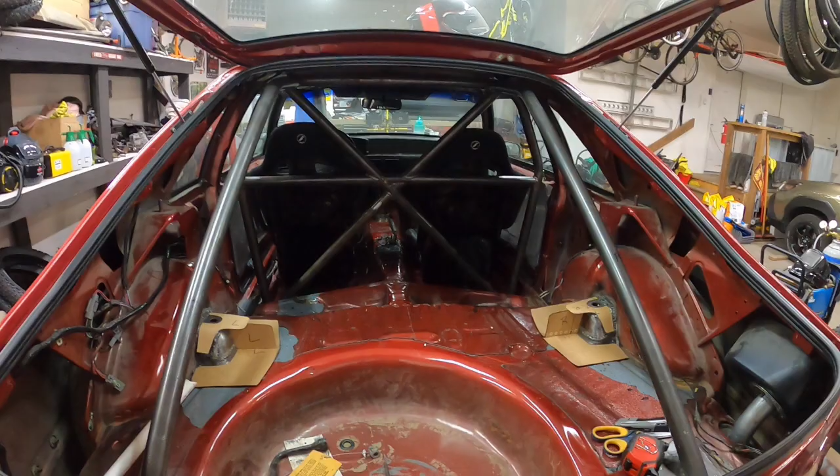Well, it's been a while since I've been out here and fired up the GoPro working on the Foxbody, the Mustang here. And I just thought I'd show you guys where I'm at. So last update I showed, I had the cage all welded in. Well, I still wanted to reinforce these shock towers a little more, just because I'm probably overthinking it, overly paranoid. But I thought it'd be kind of fun to do too, and maybe add some more structure back here to kind of dress it up, I think.

But this is kind of what I'm figuring I'll do is I'll put a plate on the floor. And then the frame rail, can't see spot welds very good here, but the frame rail kind of runs up under the car here. So I thought I'd use this plate, and I think I'm making it a little bit too big. So I'm going to take some time and think about this a little, see if I want to trim it up.

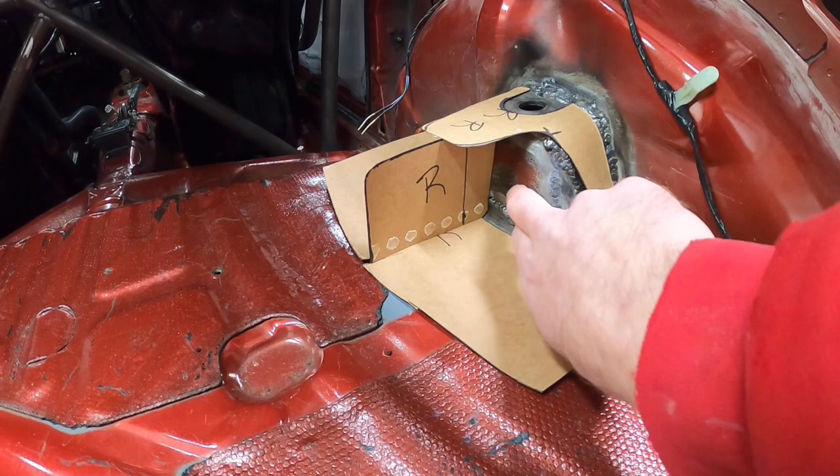But anyways, the frame rail runs under here, and I thought I'd make a plate that goes on top here that kind of ties in to the top side of the frame rails on each side, and then make another piece that kind of goes up and over the top of the shock tower here. And I'm going to leave a little opening here for the little rubber bushing and everything that goes for the top of the shock, the coilover, just so I'm not getting it too thick here. And then use another piece here, an upright, so then it'll tie in to the bottom plate, the top plate, and then weld it into the shock tower there to really reinforce it.

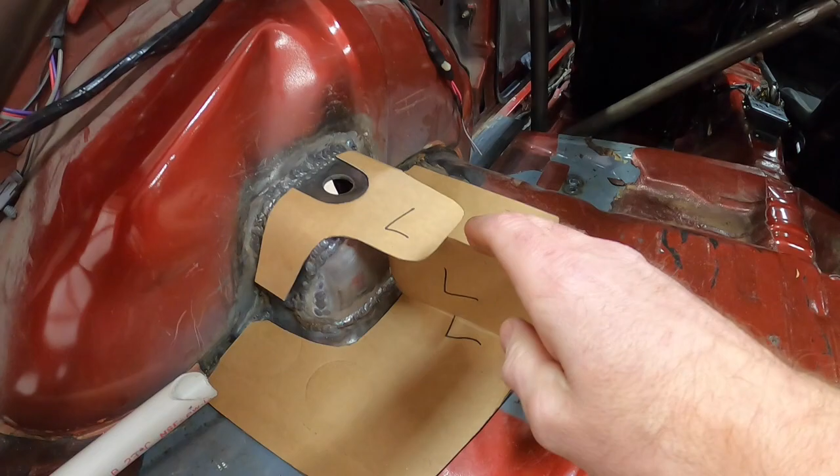Then what I think I'm going to do is run a bar across side to side, and then run another bar and put a tab on the bottom of the cage here, and run it down to the top of this upright bracket on each side. And see here a little bit, this down tube from the roll cage is a little bit more towards the center of the car than what this side is. But I'm thinking I'm going to run a tube pretty much straight down so it's completely vertical from the roll cage down to the top of here.

So I'm actually thinking about trimming up this piece on both sides, trimming this back just a little bit. This side I think I'm going to trim back just a little bit here, and I think I'm going to actually build this so it comes up over the top of here and has a tab on the top to tie into the roll cage.

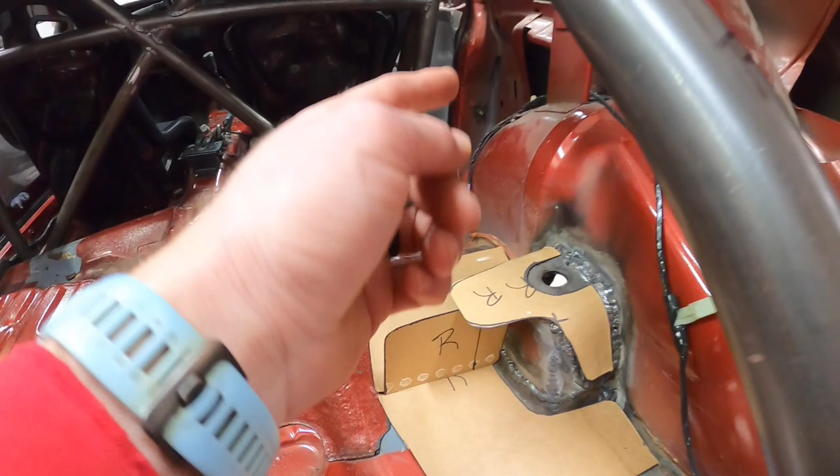And I'm thinking I'm going to do that on each side here, but like I said, this side sticks out a little more, so I might just leave this tab hanging out this much on this side, and again make this piece a little bit taller so it has a tab up on the top, and then put a tab on the bottom of the roll cage there, and then tie that all in. But I'm going to go inside, do some math, and figure out what I really need here, and then I'm going to go from there.

I don't know how you can lay here on this floor. It's about 55 degrees in here with the heat turned up. That floor's got to be cold. How do you do it, Barney? How do you do it? Well, enough of the shop dog.

Doing a little more tweaking on my nice cardboard layouts that I have for my cross member that I want to build, supports that I want to build for the rear shock towers here. So I got center lines drawn for where I want to put holes in all these. And got them down here on these ones too, both sides, and did some measurements.

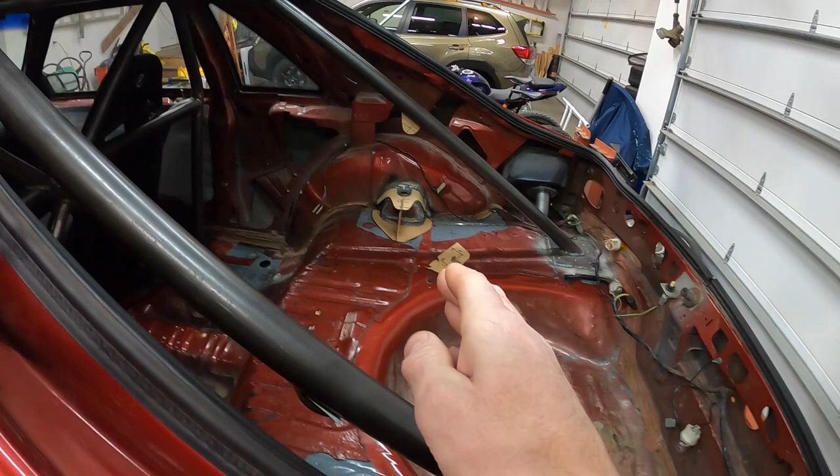So I had about 32¼ inches between side to side, and then I checked just between where I have things hung, and I just kind of eyeballed it to make sure everything looks vertical, straight, front to back, side to side, however you want to say it. And just did some measurements, laid it out so it looks like that upper center hole is straight above where the bracket down there is, just the best I could by eyeball. It looks pretty good to me.

But I think I'm doing pretty good here, because the measurements I got for side to side were about 8 3/4, kind of trying to hold the tape measure and everything, and 8 11/16. So I think I'm doing pretty good. Things seem to be lining up pretty well, and feeling pretty good about this.

So the next thing I'm going to do is pull these out of here and mark off. I'm going to have these uprights here, this piece, be 1/4 inch thick, along with the tab that goes up on the roll cage. And then the other pieces, the top and the bottom piece, are going to be 1/8 inch steel, is what I decided I'm going to do. And so I'm going to pull these out, kind of lay them out on a table, and hopefully get some steel bought.

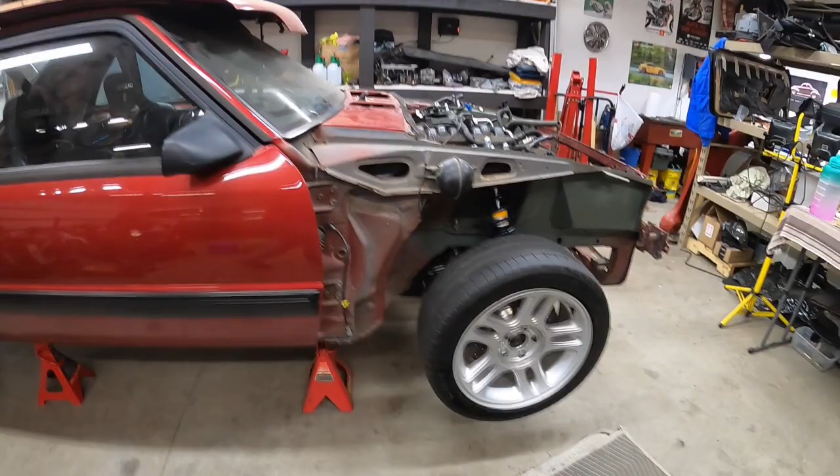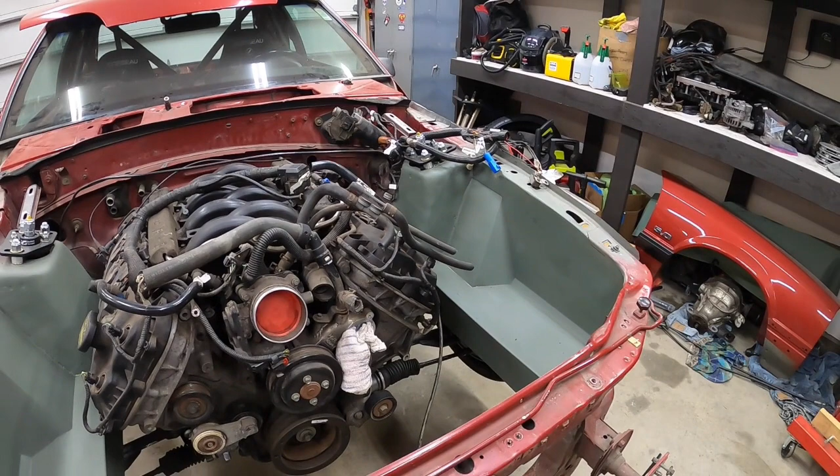Well, next thing is I'm going to work on seat brackets. Then I also have an idea of how to lay out some strut braces on each side. So I'm going to have to make sure things aren't going to end up in the way of the engine itself. I'm thinking I'm going to do something like what I did in the back, build a bracket that mounts to the firewall, build brackets that mount to the shock towers, and then just run like a tube with an eyelet on each end for the actual bracing itself, so I can remove that stuff as I need to and put it back in place as I need to.

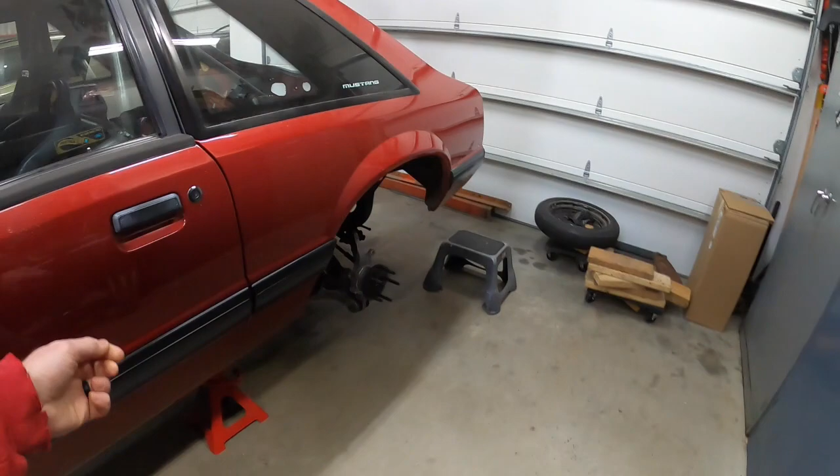So we'll go from there, see what I can figure out. And of course, seat brackets. I think I'm going to work on those next. So I'm going to pull this seat out of here and then just use some cardboard and basically make a bracket that mounts right to the floor, and then figure out what I'm going to do from that bracket that mounts to the floor up to the side bolts on the seat.

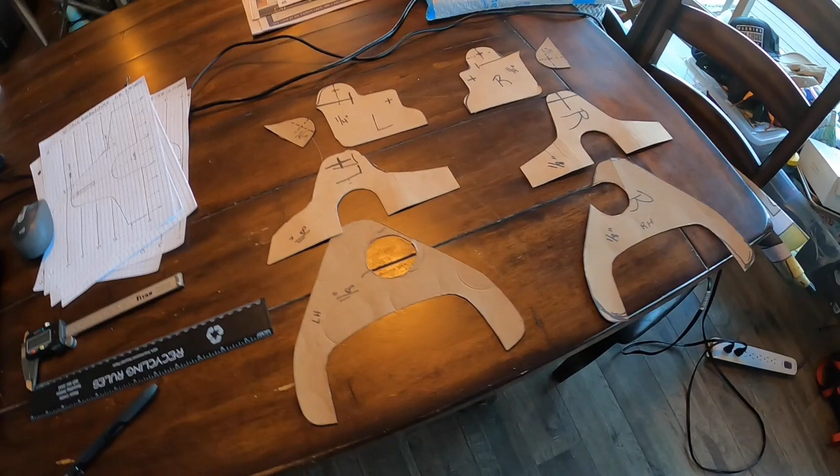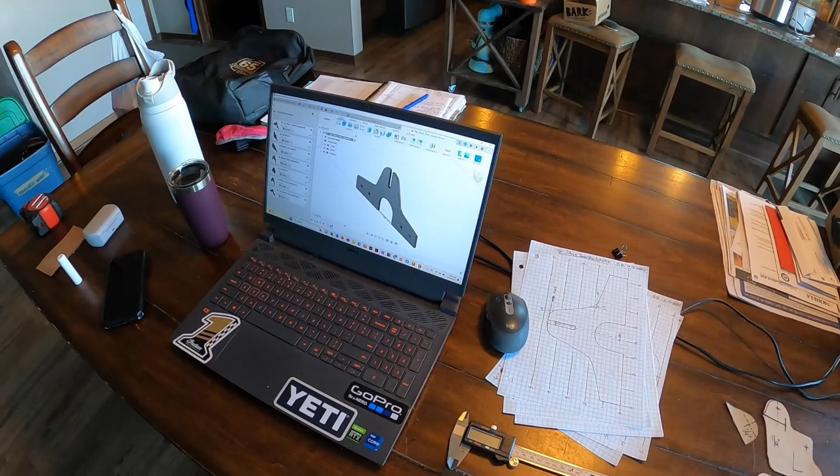All right, I thought I'd show what I was up to this whole weekend. So I started out, and I think I showed you guys this stuff sitting in the car. So I made all my little templates out of cardboard, well, some cardboard boxes, beer box, whatever. And made the templates. So here I got the stuff for the right hand side of the car, here for the left hand side. And then I thought, well, it's been about 30 years since I touched CAD, it was like the late 90s when I took some CAD classes.

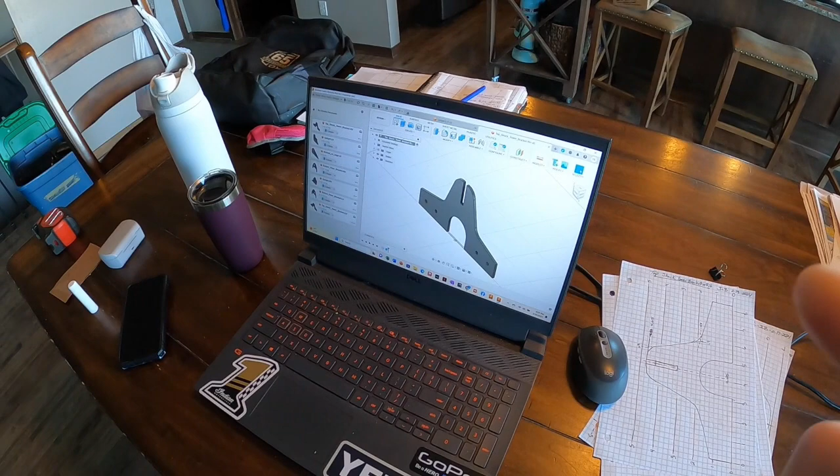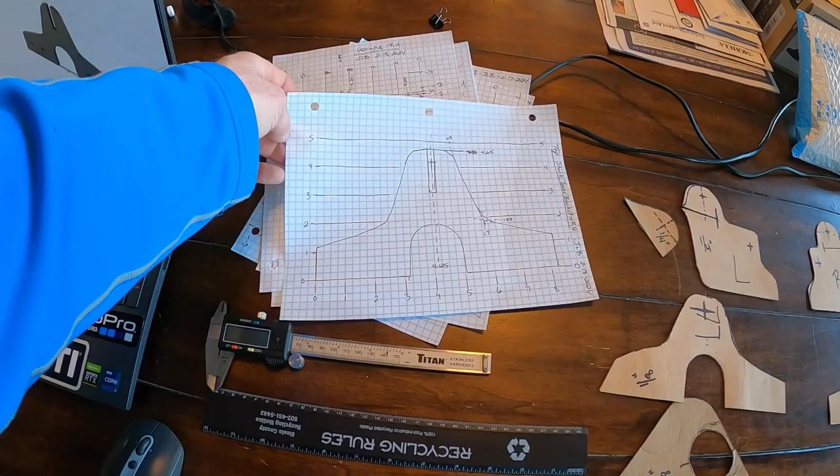So I talked to a friend and he let me know about some free software you can use. Well, it's free as long as it's not for commercial, Autodesk Fusion Personal. I'll try to take some screen recordings of this and show what I did. Then I thought I'd use a ruler and a caliper here. And then I got a little bit smarter, and my wife had this nice graph paper sitting around, so I took all my templates. So here's the right hand side.

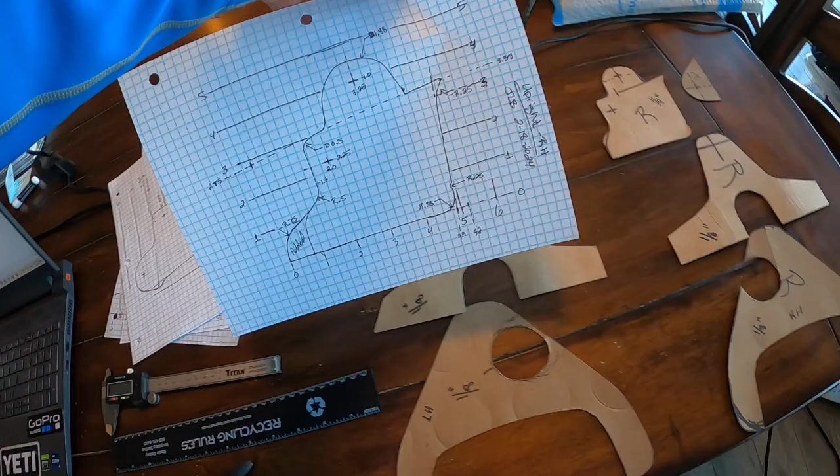So I just trace that onto some graph paper and put it into CAD. So like I said, I'll try to take some screen recordings. So here's the right hand side for the upright piece. I did make some modifications to it, like I did make a hole here because there's a grommet that goes into the top of the frame rail basically on each side.

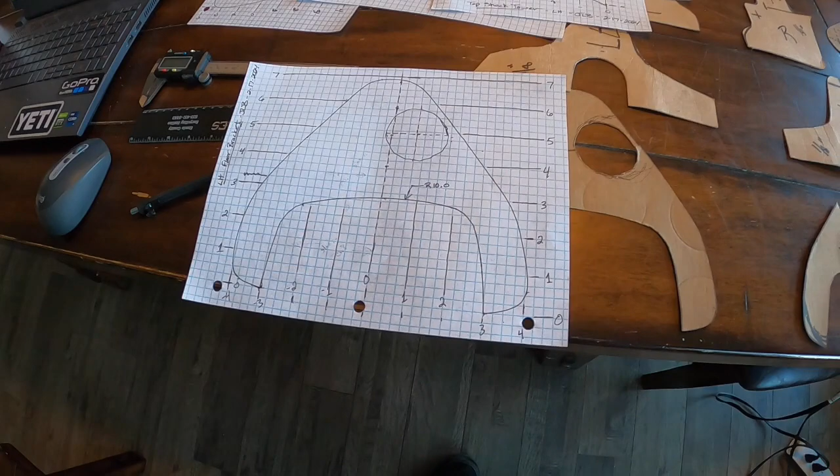So I cut out a hole there, and so as you can see here, I kind of made the pieces a little bit bigger, and then I extended it on this spot here so that it should completely cover where the frame rail is underneath the floor of the car. And then left a little bit of material here.

So just to show what's going on here, as I talked about, I had all the templates made up, and I thought I'd get all this stuff drawn up. And I was talking to a new friend at work that works in our machine shop, and he said if I drew some stuff up in CAD and gave him files as a DXF, that I could work on getting stuff water jet cut. So this was my project for this whole weekend.

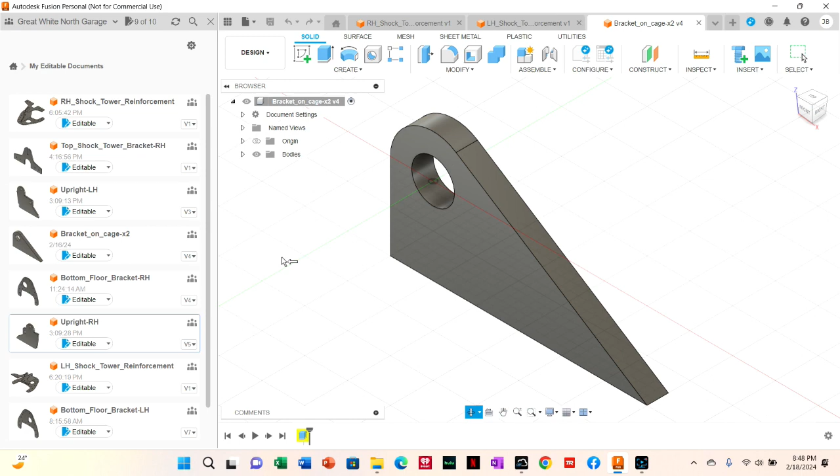I showed previously in video that I made everything out of cardboard templates, and then I transferred it onto graph paper, which worked out really well. So then I went through and I got Autodesk Fusion Personal, not for commercial use, and just drew everything up in here. So the piece that goes on the roll cage is a 1/4 inch thick piece. And then I just drew all the other things out too.

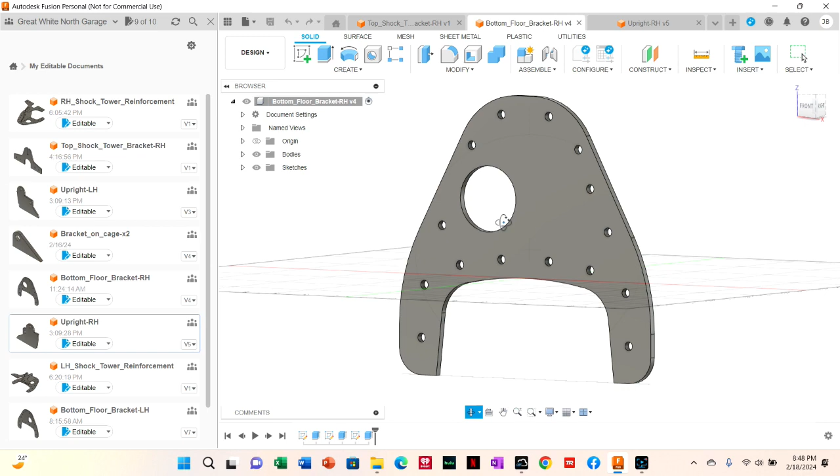So I got a bracket on the floor, and as I mentioned before, I thought I should probably put a hole in there for where that one plug goes in the floor. So I'm pretty happy with how all this has turned out. I think I mentioned before I haven't touched CAD in probably 25, 28 years, something like that, when I did this stuff in college. Touched it once at a previous job, probably like 13 years ago, but didn't do a whole lot with it.

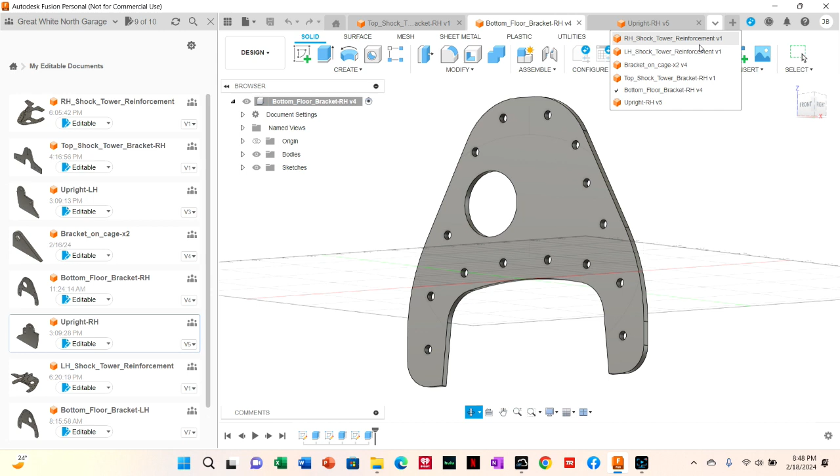This is the top piece that goes above the shock tower, but this will fit over there. So right about here on each side, there's going to be a bend in it, so these arms or wings will kind of come down next to the shock tower on each side instead of being flat out like what it is here.

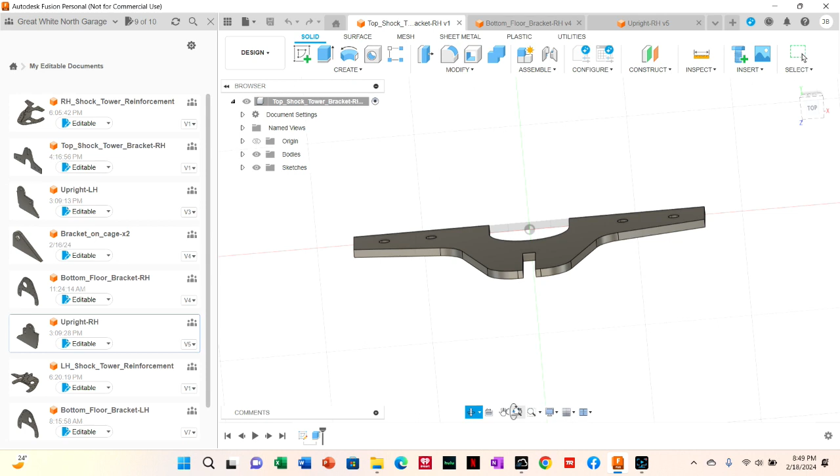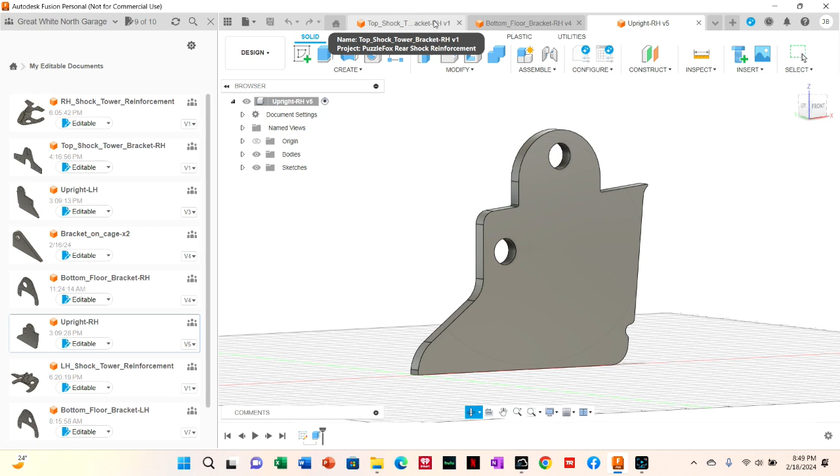And the trickiest part was this upright piece. So again, the floor piece will be down underneath here. The shock tower piece will be here. This is a tab that'll go up and connect with that tab on the roll cage, and this one is the hole that'll connect from side to side. So when it's all said and done, it'll look something like this. So I'm pretty happy with this. Like I said, I spent probably a good part of the weekend working on this.

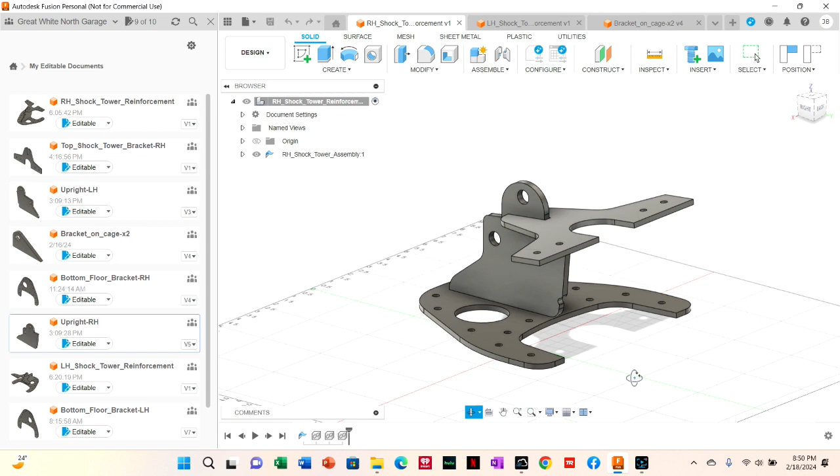So again, these tabs right about here and here will be bent down on each side to fit on top of that shock tower piece. Some of this might be a little bit too thick. I might have to end up taking some material off the bottom of this piece when it's all said and done, but I think just having this stuff cut out will be a major lifesaver. Save a lot of effort on my part. Otherwise, my thought was I'd just get some flat metal and cut all this out with a jigsaw.

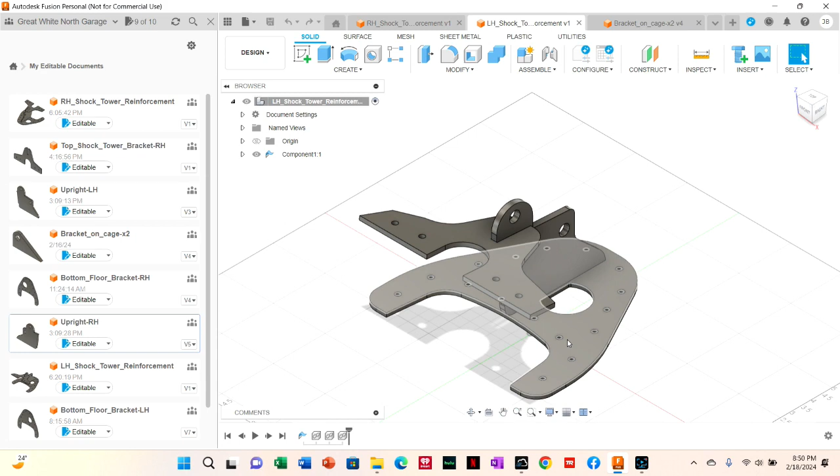So then the left-hand side, so the driver's side, again, will look like this. So my next update, hopefully I'll have worked with my friend at work to get some of this stuff cut out on the water jet and be ready to install this in the car. Pretty excited.